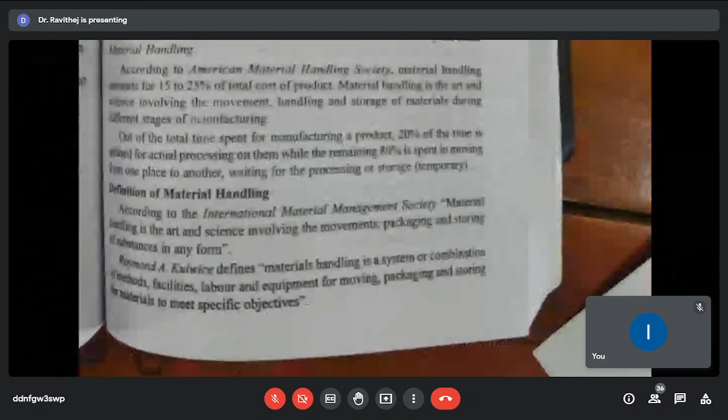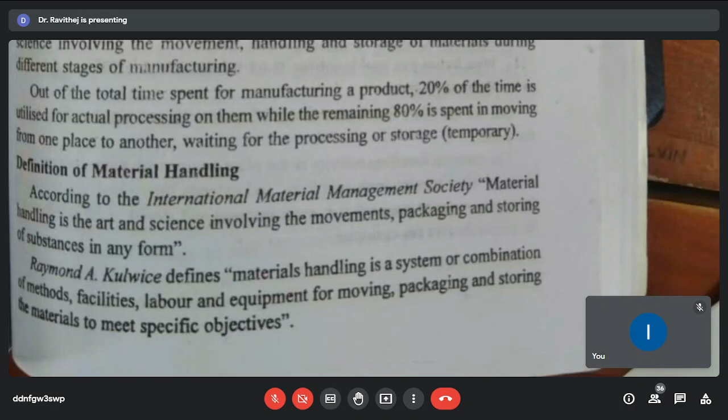So what is materials handling? In short, the definition says handling is the art and science involving movement. Material handling means it should be handled very carefully while moving the material from stores to workyard. That is called materials handling, and it includes packaging and storing of substance in any form.

Another definition for materials handling is a system or a combination of methods, facilities, labor, and equipment for moving, packaging, and storing the material to meet specific objectives.

However, both definitions of materials handling emphasize one particular thing: using equipment to move material from stores to a work spot.

It is the art and science involved because we use some prescribed equipment to move materials, like rolling machines, belt machines, and separate forklifts to handle the equipment.

There are a few spares which are very sensitive in nature, like glass materials, which should be handled very carefully—so science is involved. Whereas a few workers are expert in handling the equipment, more experienced, so their art is also used to move the material.

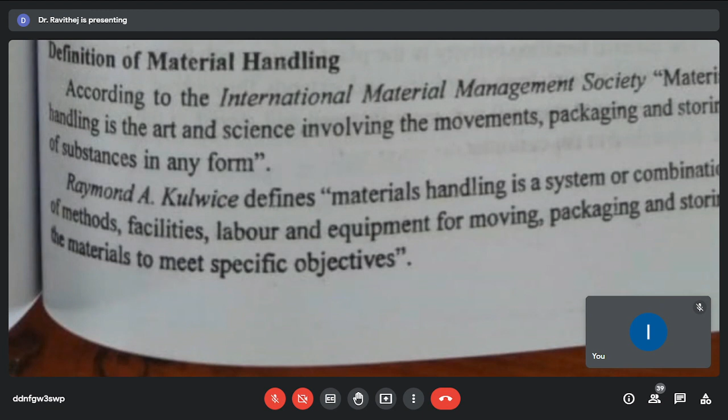However, the word handling refers to moving the material from stores to the workyard, and after finishing the job, again packing it and storing it in the storeroom or stock room. So it is called materials handling.

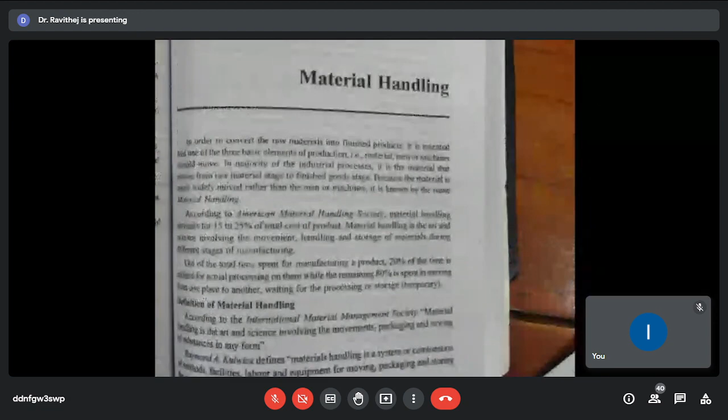So we have seen two definitions. Another important thing is what all items materials handling is concerned with. There are a few things to be remembered while talking about materials handling.

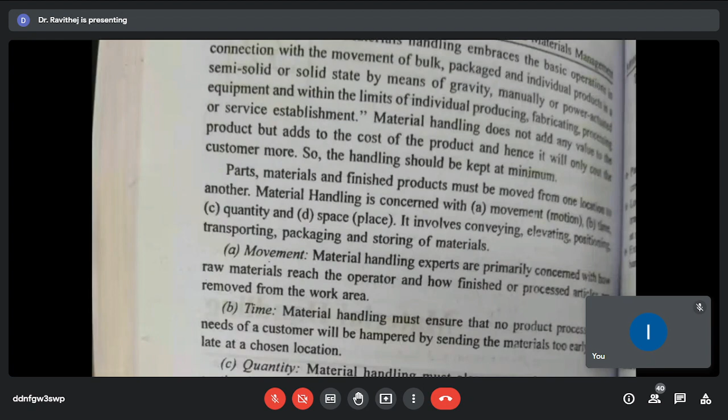Handling keeps emphasizing the movement of materials. So movement is the first integral part of materials handling.

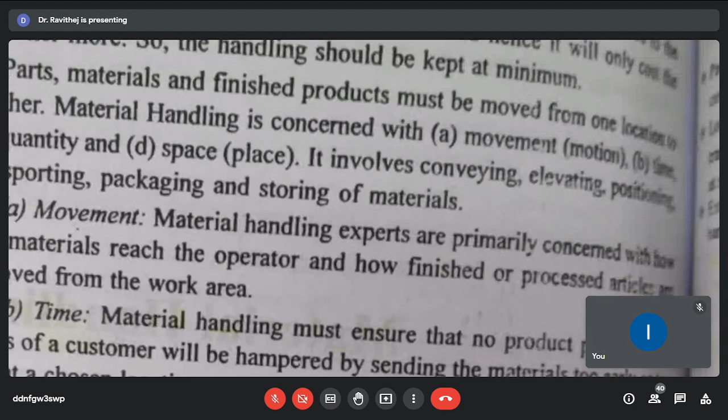Materials handling experts are primarily concerned with how raw materials reach the operator and how finished or processed articles are removed from the work area. It should be moved from stores to workyard.

As soon as it is finished, again it should be packed and stored in the stock room. So this movement should be handled very carefully with the help of scientific tools like jig-jack machines, forklift operators, and elevation machines.

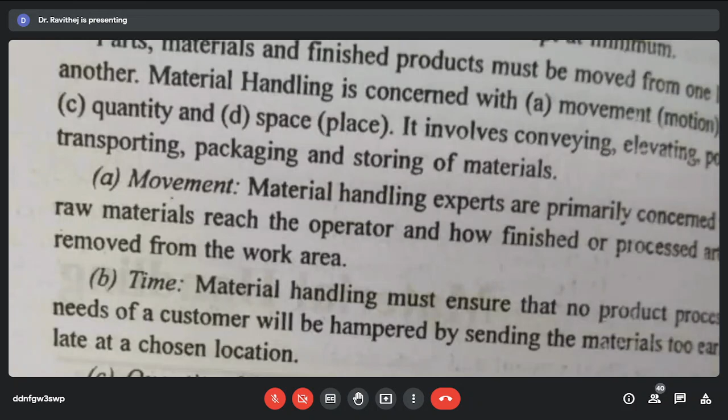Time is also an important factor. Materials handling must ensure that no product, process, or customer need will be hampered by sending the material too early.

In a storeroom or at a work spot, another important thing to note is the materials manager should maintain the timing of moving the material. It should not be too delayed, but at the same time, not too early to the work spot.

If materials arrive too early at the work spot, it will interrupt the free flow of production. If the machine is working with some other material, this material will cause a small disturbance to the work area.

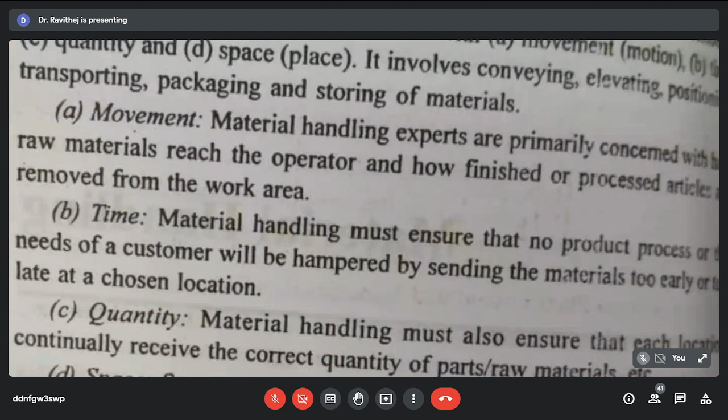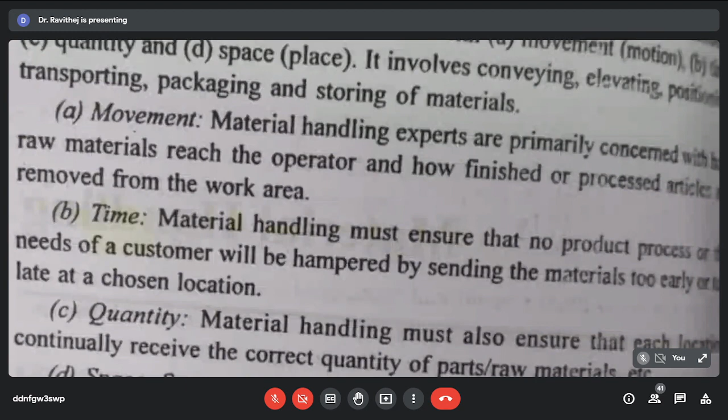So time is very important. The materials handling person should handle and move material whenever necessary—not cause undue delay, but also not let material reach the spot too early.

Quantity is also important—the right quantity of material should reach the work spot. Otherwise, if less quantity reaches, it will interrupt the flow of production. And if more quantity is delivered, it occupies more space, again disturbing the production process. Space requirements are generally influenced by the materials handling flow pattern.

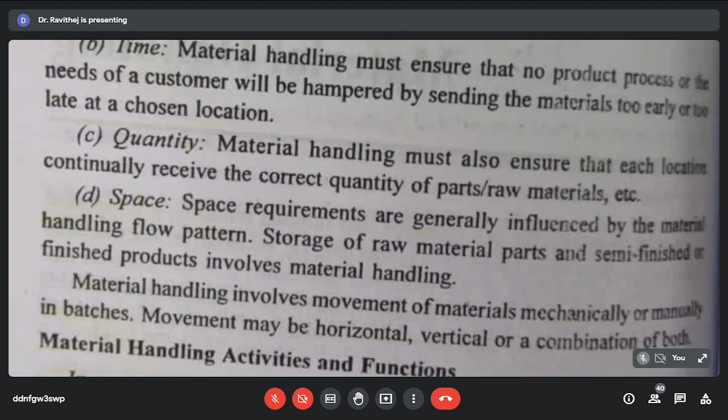Storage of raw materials, parts, and semi-finished or finished products involves materials handling. A good materials manager will pay attention to space management, meaning the existing area should be properly utilized. If you are a good material handling manager, you will place materials in a way that minimizes space in the office or factory, while keeping them easy to reach and easy to take.

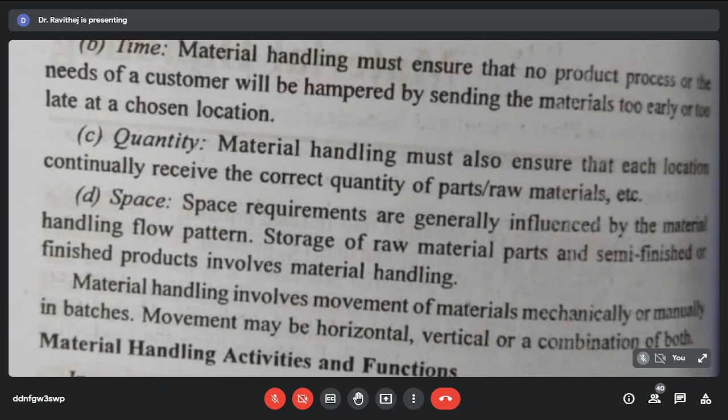For space management, the person will use FIFO and LIFO methods. You might have already studied these: first in first out, and last in first out methods are used to achieve proper space management, so that in less space you can store more materials.

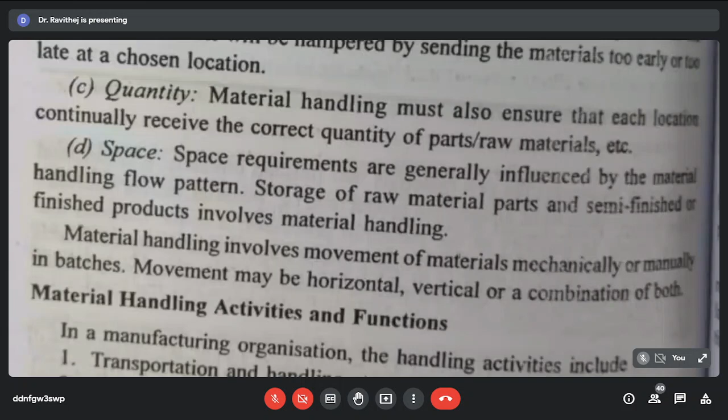Material handling activities and functions: what are they? Transportation and handling at the supplier, material handling at the manufacturing plant, transportation and handling from warehouse to customers, and physical distribution. So the material handling activities and functions, first one is transportation and handling.

Second is material handling in a manufacturing plant. First, it starts with transportation. Logistics should be noted - while you are buying, you should ensure the handling starts from transportation itself. You must transport the materials in a safe way and ensure that without any damages it reaches our work spot.

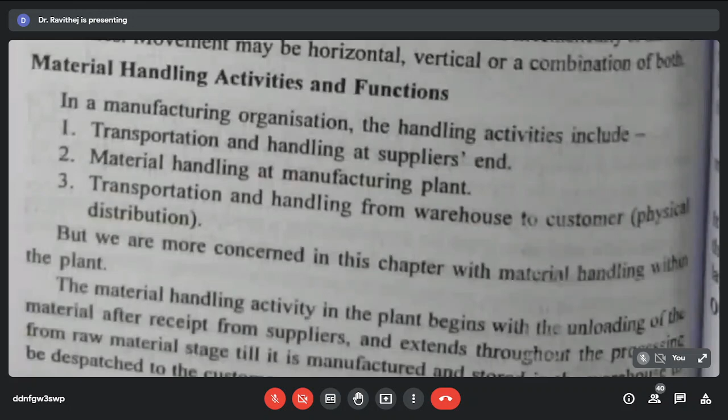Second, handling the material inside the factory is also very important. And again, after finishing the product, transporting it to the warehouse would also be ensured. This is all the materials handling activities and functions.

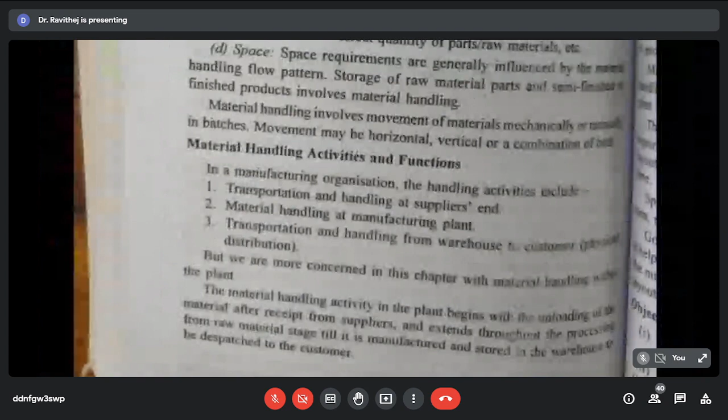Now let us see how it works in a manufacturing organization: packaging at customers' end, loading and transportation from supplier, and external plant handling. Next, this is called manufacturing organization material handling activities and functions.

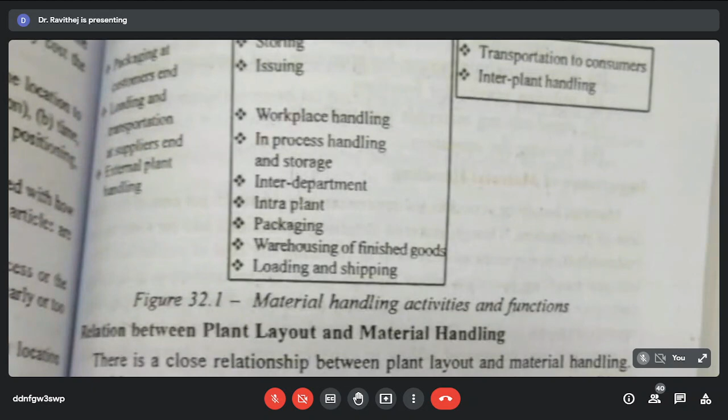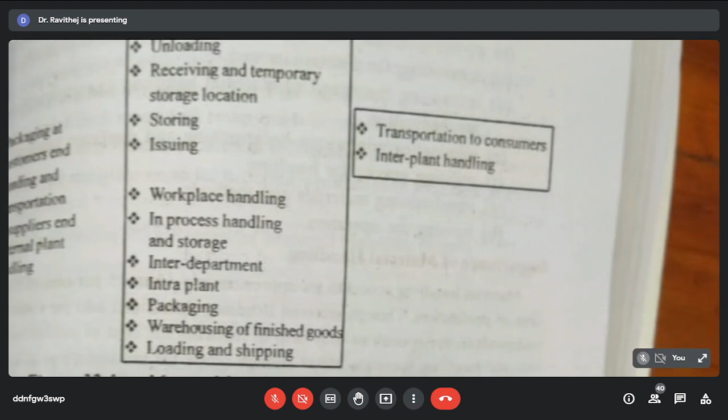Unloading in a factory - we unload it, receive it in a temporary storage location, storing and issuing, workplace handling of stores, inter-department, intra-plant. This is all happening inside the factory, and finally it is transported to the warehouse, where material handling labor is required.

A relationship between plant layout and materials handling: material handling and plant layout have a great interlink with each other. This is a concept you might have studied in production. What is layout? Layout emphasizes...

It is the design and drawing of a factory, showing where things should be located inside the factory, where the materials are located. For example, in a small factory, some materials are fixed and some are variable in nature, so where machines are located inside the factory is called the layout of the plant.

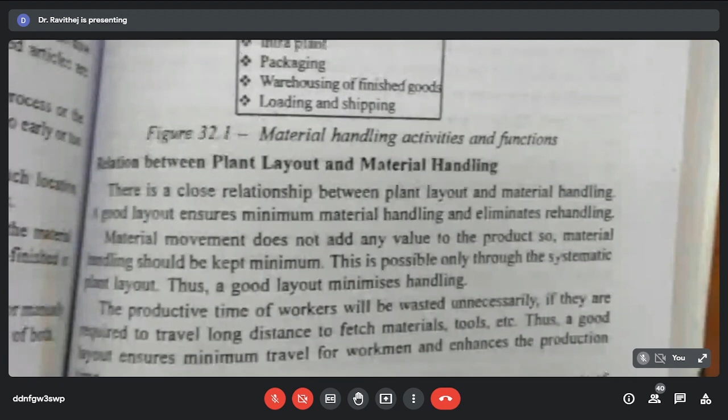Layout must be very good to achieve successful handling of materials. For example, if you are handling material in a factory, the location of a machine should be properly arranged. So layout is very important in material handling - the success of material handling is in the hands of the layout of the plant.

Objectives of material handling: selection of machine, equipment, and plant layout. Selection of the machines and equipment - the first objective is to have a great impact on handling in a safe and secure manner, to move the material from one place to another. It highly relies on machines and equipment used to handle the material.

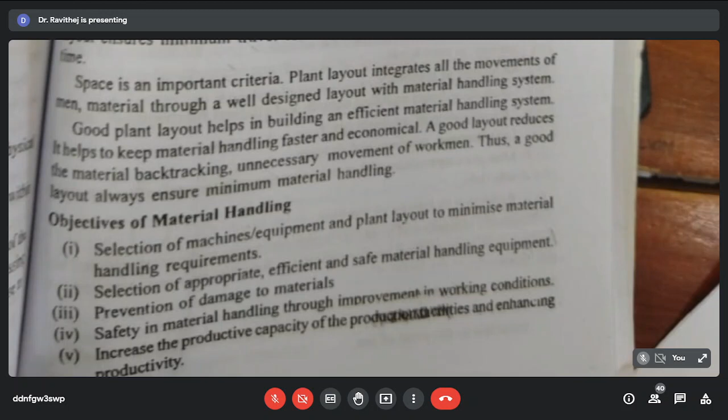Materials handling is not just physically stored or physically handled later - you need separate equipment and machines to lift the material in a safe way. So machines and equipment should be properly used.

Selection of appropriate, efficient, and safe material handling equipment. For the equipment used to handle the material, you must ensure the safety of the machines - you should keep servicing the machine and check the machine's performance.

Next, prevention of damages to materials and safety in materials handling through improvements in working conditions. So check the safety, increase the productive capacity, and productivity should be improved - if you are a good materials handling person, you can improve the productivity of the company.

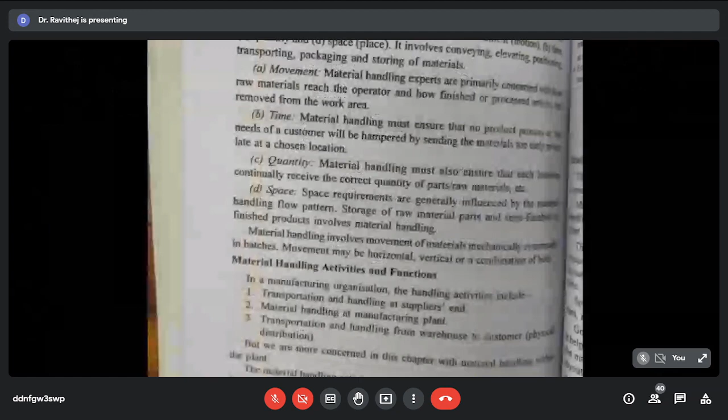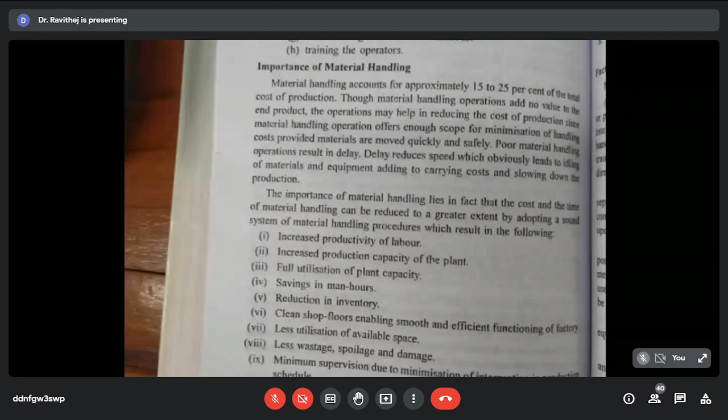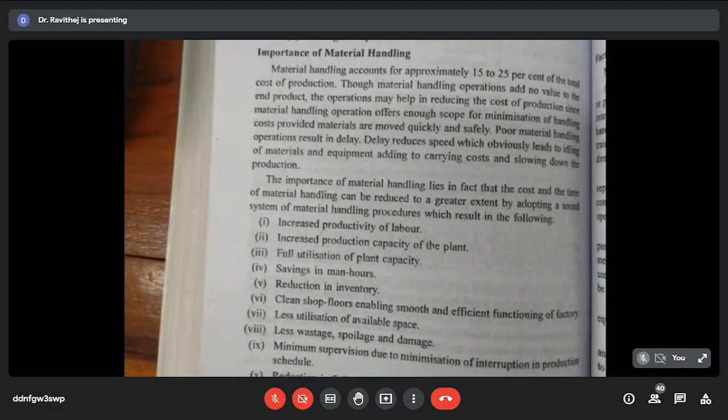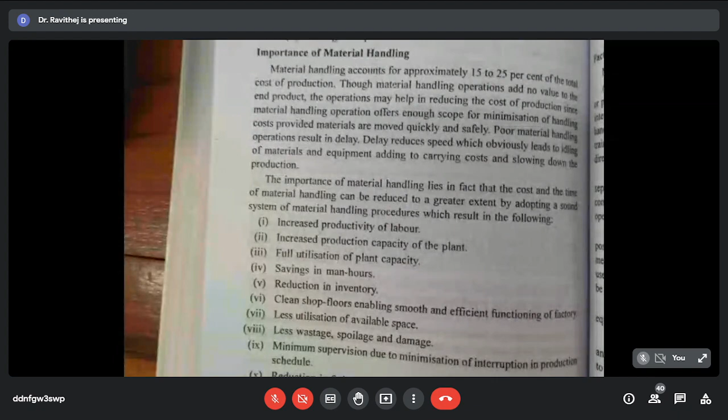Importance of materials handling. What is the importance? It increases productivity and production capacity, both are the same. Full utilization of plant capacity - if a plant is able to produce 100 units per day, all 100 is fully utilized.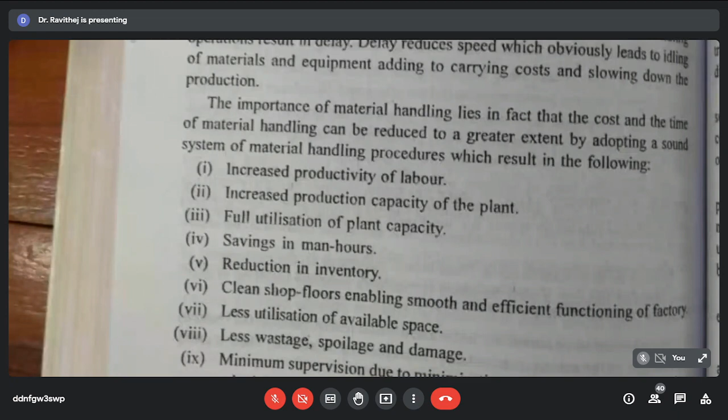If you are good with materials handling, it saves man hours. If you use good equipment to handle materials, you can reduce manpower. Reduction in inventory means unnecessary wastage of stock is avoided. Clean shop floors enable smooth and efficient functioning of the factory, increasing productivity.

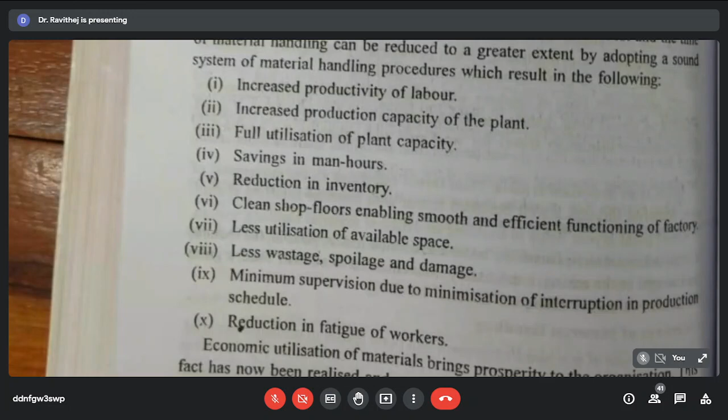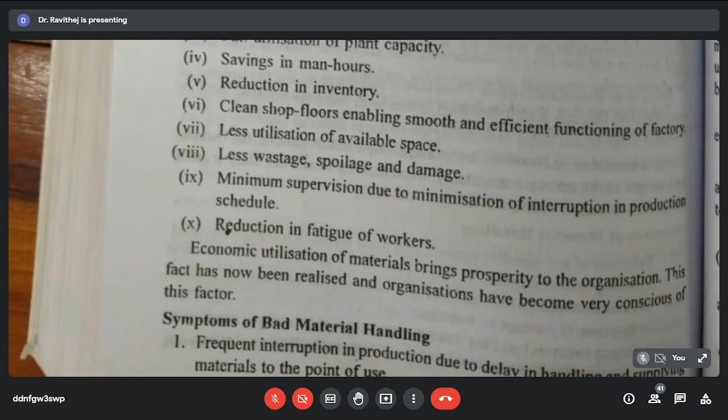Less utilization of available space means the space is properly utilized. Less wastage, spoilage and damages can be avoided. There is minimum supervision due to minimization of interruption in production schedule. Reduction in fatigue of workers - it reduces the tiredness of the workers, who can be utilized properly.

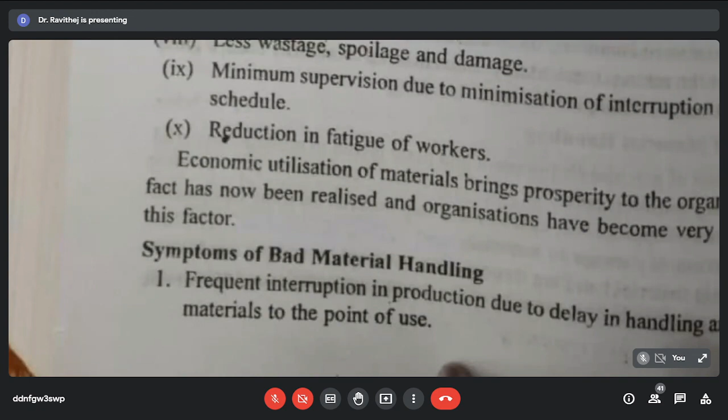Symptoms of bad materials handling - if you are not good in materials handling, what consequences will the company face? First is frequent interruption in production. If you are not good in materials handling, it will interrupt the flow of production.

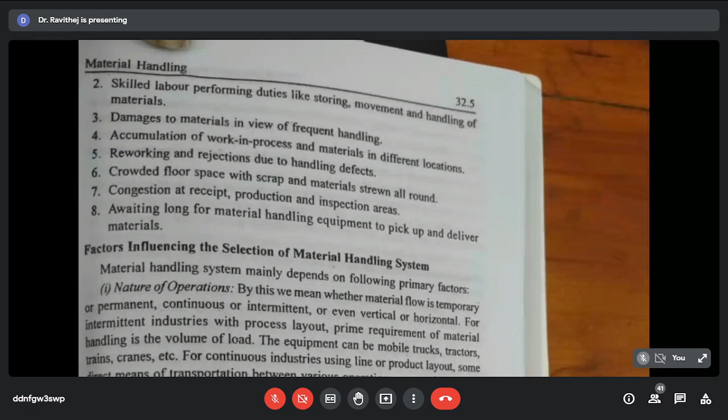Skilled labor performs duties like storing, moving and handling of materials, so labor skill will be wasted. Damages occur to materials due to frequent handling, and there is accumulation of work in process with materials in different locations - work happens at one point while materials are located at another, which increases time.

Reworking and rejection occur due to handling defects. If you are not properly handling the materials, it invites unnecessary reworking in the production process. This also causes crowded floor space, occupied either by material or by labor, creating unnecessary crowding in the work spot.

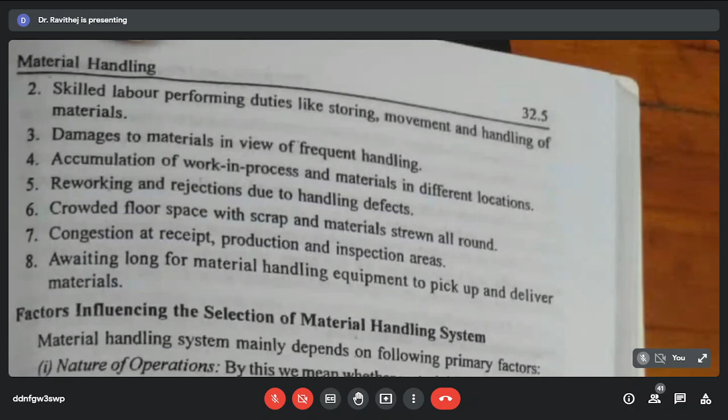Congestion at receipt is the same issue - the space is occupied by the crowd. There is also a long wait for material handling equipment to pick up and deliver materials, which increases production timing. So these were the symptoms of bad materials handling.

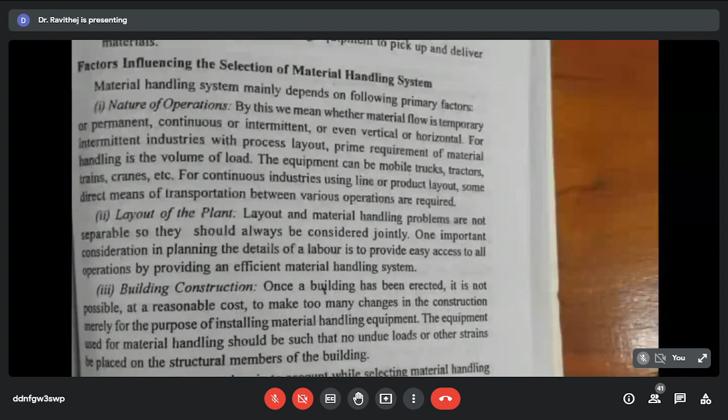Just a minute, guys, I'll come back.